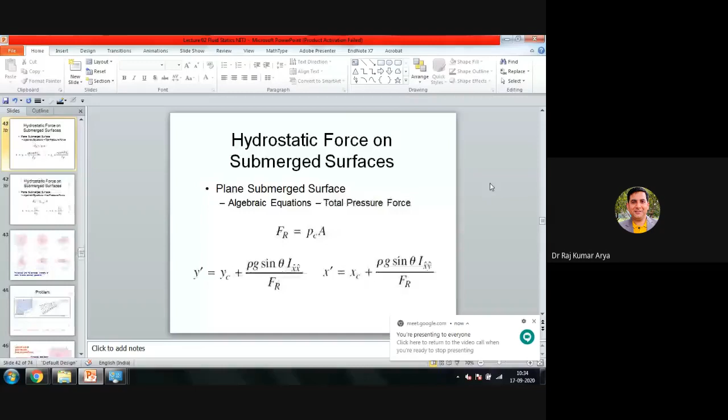In the previous class we were here, right? Yes, sir. So in this particular problem, what we were solving, first we calculated the force, and for force you have just calculated the pressure and then multiplied by area. So at this particular point, you calculated the pressure at a particular point y, multiplied by this dA. So you got your differential force, right? Respond along the way too, right? Yes, right, sir.

In the last class we were here actually, and then we were calculating. Can you see the slide or not? Yes, sir, we can see. Visible, sir. So why are people not responding anything, just like 100% silence? If I say something, at least somebody should respond. Sir, your voice is actually quite low. It's getting difficult to hear it. So you are not able to get the voice also. Actually, I was trying to do something.

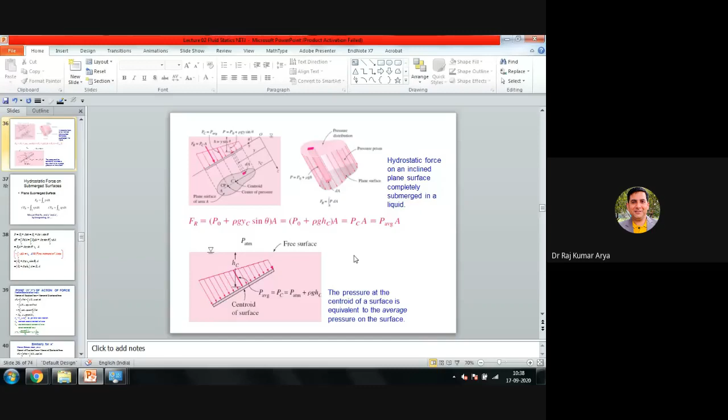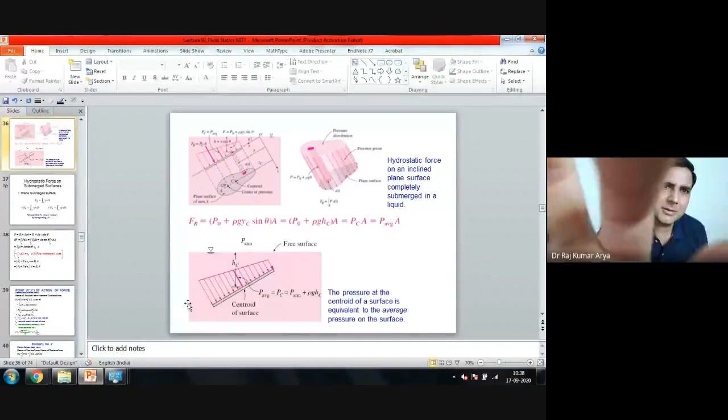Hello, sir. Now, can you hear properly? Because I was trying to fix something on the board actually. Yes, sir. You were not getting voice because I ordered the headphone and it has not yet come actually, so I can't help it. Anyway, we were somewhere here, so we were solving here. Can you hear properly now?

Yes, sir. Okay, fine. So in the previous class, we were somewhere here, and there we were calculating some pressure here, something here actually. So we were somewhere here, right? So in this particular case, because I am not used to this marker thing, it still takes time.

Everything is tedious actually. All electronic items just need a lot of training.

So what we have, we were previously here. So in that particular case, you were finding where this force will act. So you have taken a distance y from here, and from here you have calculated the corresponding pressure at this particular point, and then you have calculated pressure multiplied by differential area. So the differential area, this is your dA here. And which is how much? That was your dx into your dy, right?

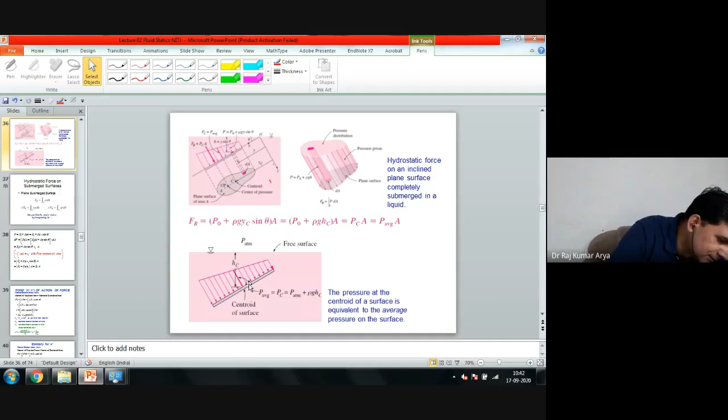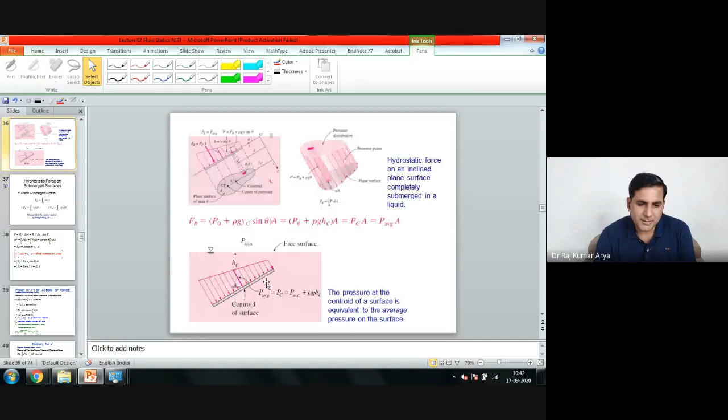We were finding the net force to act there, and so for that purpose we were finding the moment here. Under the balance condition at this particular point, let's say you want to apply a force on this side, and let me change this shape because this will work for us. So let's say you want to support this particular thing, so you want to apply a force which is equal to the net force provided by this, and this force was nothing but the pressure corresponding to area. So you have some pressure here, some area, pressure multiplied by area. So you have calculated it by integrating the entire pressure into area. Fine. So therefore you got this particular expression.

Now we want to calculate where the net force from the other side would act, meaning the net force from the fluid side. This is the force from the fluid side, provided by the fluid pressure. This is the force which you are providing from outside just to support it. Fine. So in that case, you want to know how much distance away from here it will act. So these are two forces. So you are calculating the moment of the resultant force about this point, or any point on the surface. Choice is completely yours. So about this point, and the moment of all individual pressure forces. So what are the individual pressure forces?

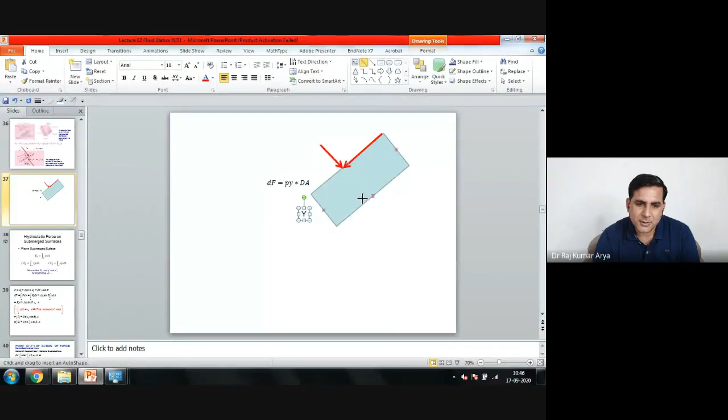This is y. So you are calculating pressure at point y multiplied by dA. So how much would dA be corresponding to this? If you want to calculate just dA, just draw the two lines here. If you want to find dA, dA corresponding to this would be only this much area, where you have just changed a differential y here. So this is your dy practically, and dy multiplied by width.

How much is the width? This entire gate, this much is the width of the entire plane. So this is your w actually, or you can say this is your x coordinate, this is your y coordinate. So your dA would be this differential change in y, dy, multiplied by this entire thing, dx, which is the width of the gate. That is your dA. Fine.

So you can rewrite this particular equation again. So what would you rewrite here? What would be py? So this is your y. So what would be the vertical height here? How much would the vertical height be? This much only, right?

Hello? Yes, yes, sir.

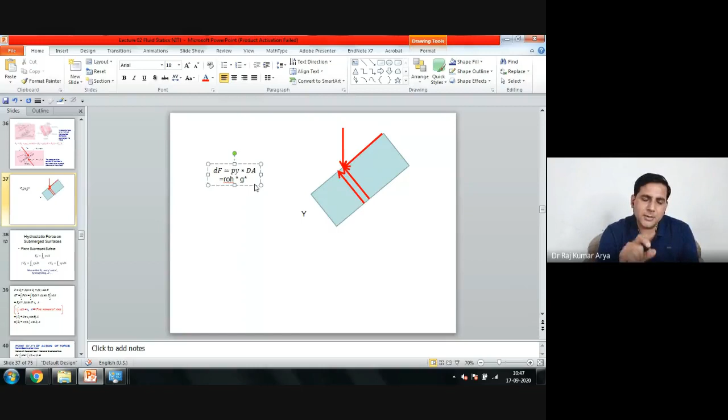So this much is the vertical height. This one is your y. You know this angle from here to here, the theta. So this would be your y sine theta, right? So you can write the py formula now. P would be your density, that is rho, multiplied by g, multiplied by y. Now this py is the pressure corresponding to this y. This would be this much height only, so that is your y sine theta actually.

I'm just writing theta as capital T so that I don't have to write theta, right? This is your pressure at this particular point y, and you are multiplying by area. Why are we considering dy here? We are considering that if you change y slightly, the pressure intensity will not change much. So pressure would be uniform over this differential y, so that you can calculate the force as pressure into area.

So this dA would be dy into dx. This much is dy, and this one is your dx. So dx is the width of the plate, and dy is the length which you have changed. So this is the differential force. Now for this case, the width is the same everywhere, so you can replace dx in the next line by the width of the gate, that is w. The rest of the things are the same. So you have integrated it there.

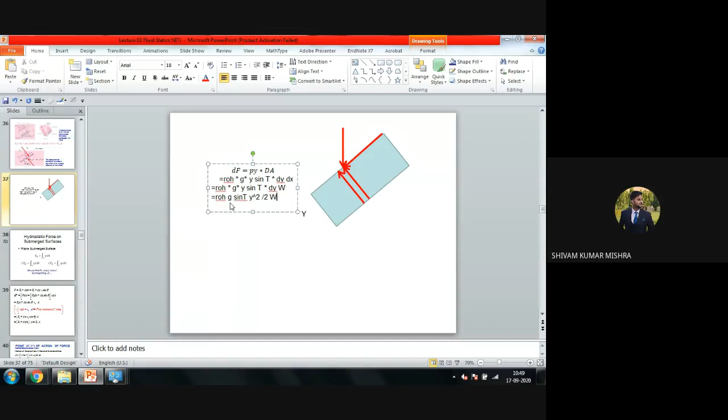So in the last class, what expression did you get? You got rho g, then sine T, then y square by 2, multiplied by w, right? Yes or no? Yes, sir. This is your entire force for the entire y. Now you have integrated over this entire length. This entire length from here to here is L. So based on that you will get the force.

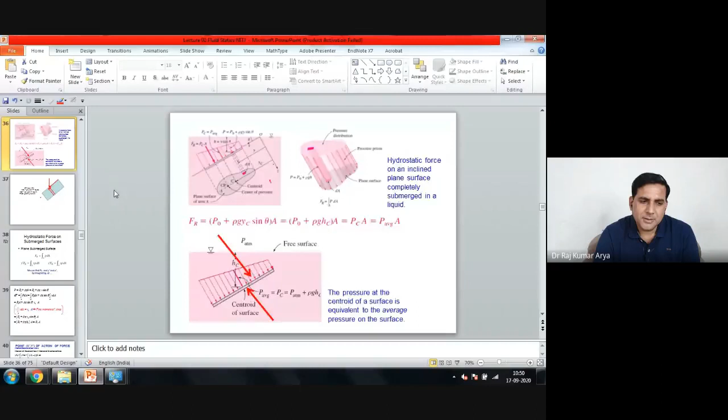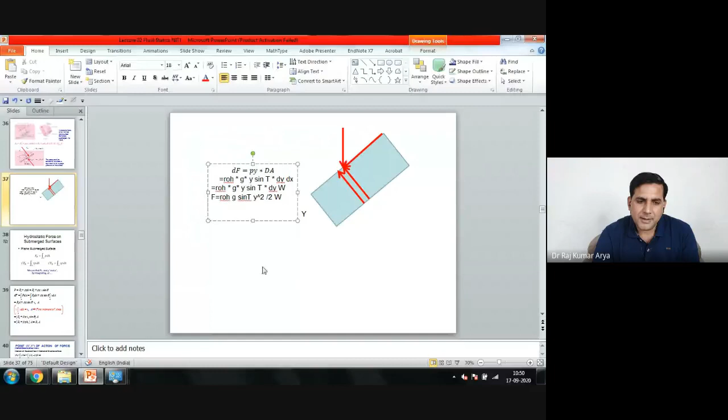So the force expression comes from the pressure only. You have rho g. You can rewrite it in this particular format. In equation format, F would be equal to rho multiplied by g multiplied by y sine T divided by 2, and one more term, y into w, right? Correct? And half of this is called the centroid, because the total is y.

If you know the total length is L, you can write this in terms of L by substituting the limits. So L is now the entire length of the plate, and you are calculating L by 2. L by 2 means you are at the center. So that is called the centroid y coordinate from this point. And then you multiply by sine T, so that is the vertical distance of the centroid from the free surface.

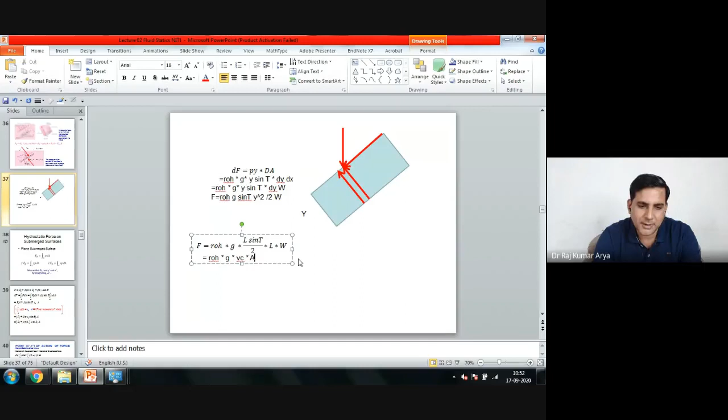This is called the coordinate of YC, the centroid coordinate from the free surface. You can rewrite this into rho into G into that. This becomes YC multiplied by L into W, which is the area of this entire thing, where L is the length and W is the width, so this becomes the entire area of the plate.

Now what has come from here? This has come as rho G YC, where YC means the distance of the centroid from the free surface. In this particular case that was L by 2 sine theta. Now this particular term is just your rho GH type of thing.

So you can rewrite this into another format: rho, pressure at the centroid into area. This is the coordinate of the centroid, the vertical height, multiplied by rho G, which is the pressure at the centroid. So pressure at the centroid multiplied by area will give the force on this particular plate. Is that clear?

Now we want to find the direction, the position where the net force would act. So far you have just calculated the force, now you want to find the direction. Let's say this force, we call the net force, or in the book they have given the name FR, the suffix meaning the net, the resultant force.

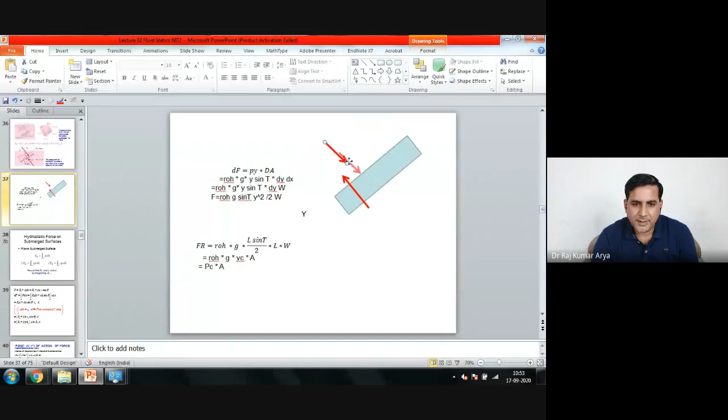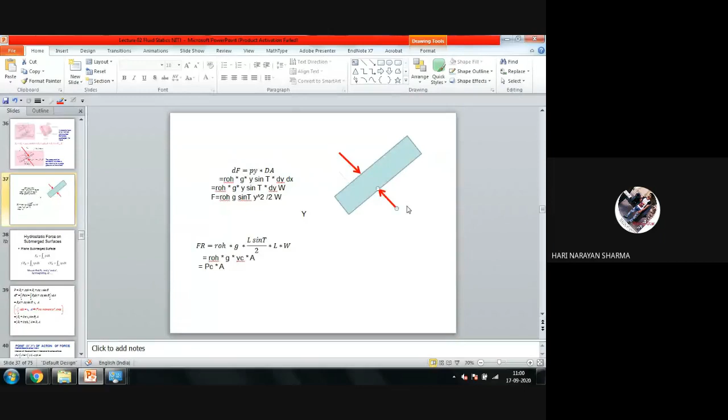Sorry, actually I have to give the question papers to kids. Hello? Yes, sir.

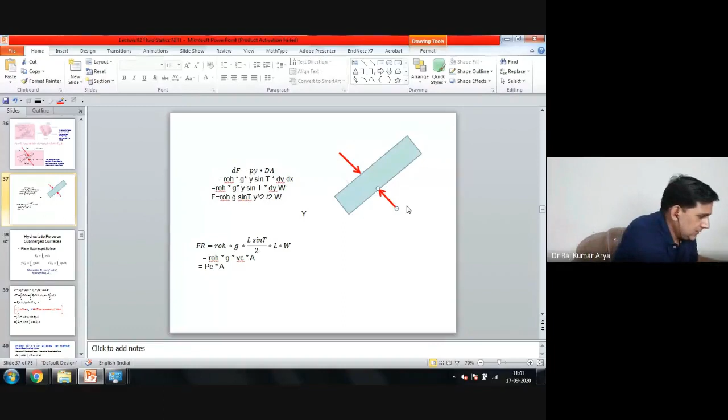So in that case, this is how we calculated force here. You have this YC which is the distance, and then you want to find where this net force would act. So what you are calculating here is an individual force. This is the differential force, Py into dA.

If you are calculating at this particular point, let's say you are calculating force at this point here, this is the differential force dF, because that is due to this much fluid only. This is the formula of that particular force.

Now you want to calculate the moment of this force about this point. So this is, let's say, y distance away. So you are just multiplying here by y. That will become the moment about this particular point.

Any response? Yes sir, hello, just say something at least. So you have this force here, you want to calculate the moment of this force about this particular point, so you multiply by this particular distance y. That is called the moment, so the same thing should be here.

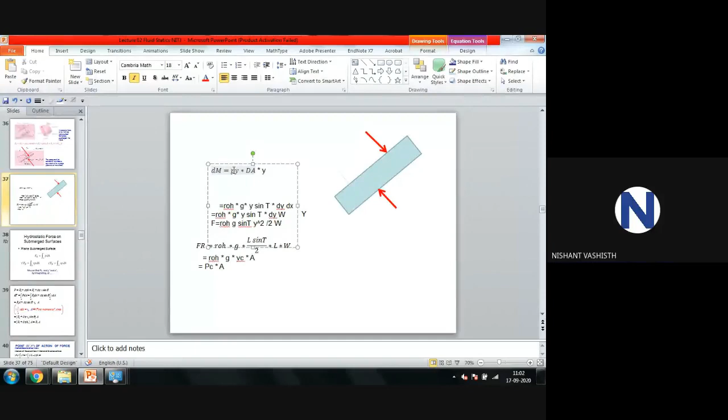So now you are calculating the moment here, the differential moment caused by this particular small force. Now suppose you want to calculate this moment for the entire plate, then what will you do? You will integrate this, yes or no? Yes sir, right, you would integrate it.

So what you would do here, because this Py formula is the same, in place of Py this is what is coming. This is your dA, no change in dA. You have just introduced one more term here, y. So you can introduce that term here, and now this is your differential moment, which you can integrate again.

So what are the variables here? At this particular place you are multiplying by y, so till here no change, only thing you are multiplying by y just to calculate the moment. Now you can calculate the total moment, if you want to calculate it, you have to again integrate it.

Again, no response. Should I wait for your response, or should I keep on talking? At least somebody should say yes.

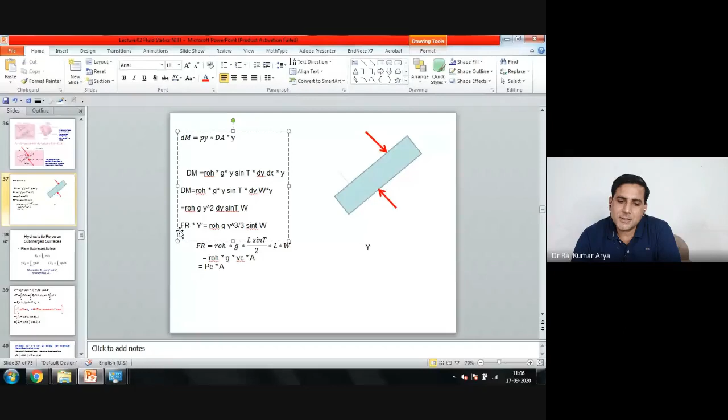Practically this is your FR into y dash. This means the net moment of all these pressure forces, and this must be balanced by the particular force which you are applying at a distance y dash away from point O. So you already know the FR formula, or not?

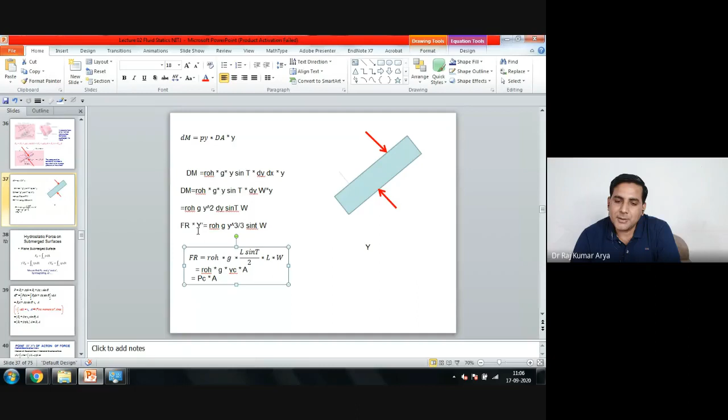FR was this only, right? This was your FR only. Yes or no? So you can substitute the FR from here to here. You will calculate your y dash. Yes or no? Y dash will come. So what would be the expression of y dash?

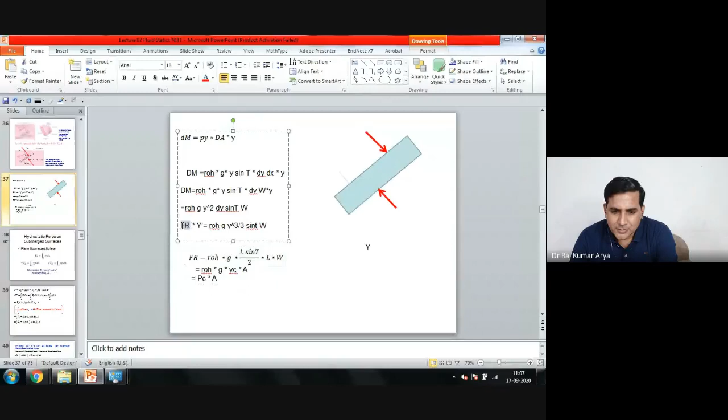If you substitute this equation from here - this was your FR - so if you substitute this FR here, this is your expression. At this place, you have substituted the FR expression from the previous derivation. Y dash you have from here - this was FR into y dash - and this one you got recently. So in place of y, you can substitute L,

because you are calculating for the entire plate. Yes or no? So from here you will get your expression of y dash. How much will y dash come to? Can you help me? Your rho g and the rho g will get cancelled, one L will get cancelled - there's L cube here - sine theta will get cancelled, W will get cancelled. So what would come here?

L square by 3, maybe sir. So this will come, I think, 2 by 3 L square. Correct? 2 by 3 L will come, sir. 2 by 3 L. Okay, 2 by 3 L. So this is the point of action of the net resultant force.

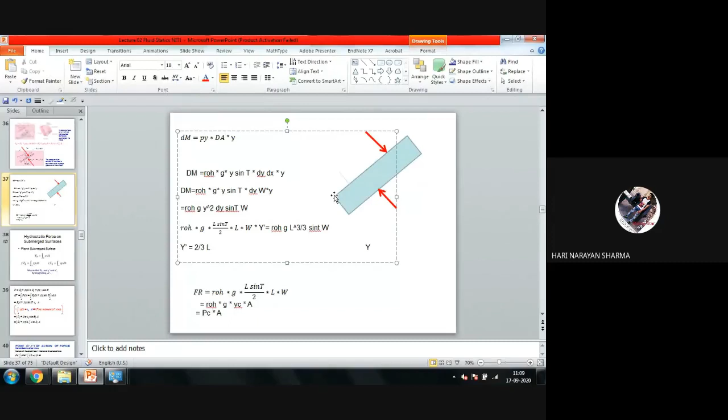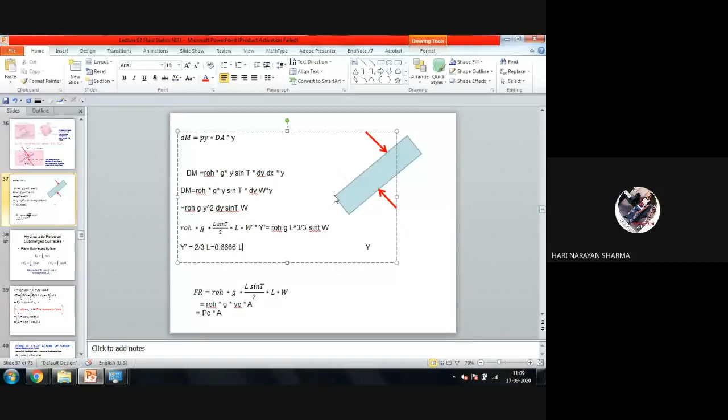It is where? How much will this come to? This is 2 by 3 L. If we solve this further, it will become something like 0.66 L, right? Yes sir. So this acts slightly more towards the lower side than half. This means the net force acts not at the centroid point, but slightly lower than the centroid.

So this is just to have a check when you are solving a particular problem and calculating the point of action of the force. In most cases, the point of action of the force would be always lower than or just equal to the centroid. Equal would occur only in rare cases. In case of fluid pressures, it will always be lower than that.

Yes, sir. Correct? So you got point of the action also, you got the force also. Your work is done.

Because once you know that this net force would act at this particular point, I will put an equal force in front of this point, then this entire body would be in equilibrium now. Yes or no? Yes, sir. Right, sir.

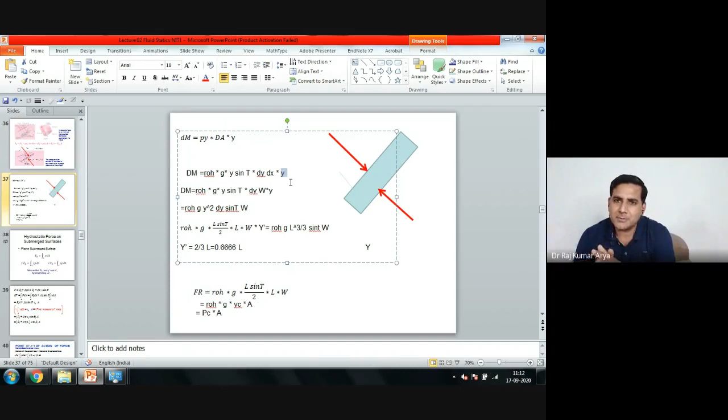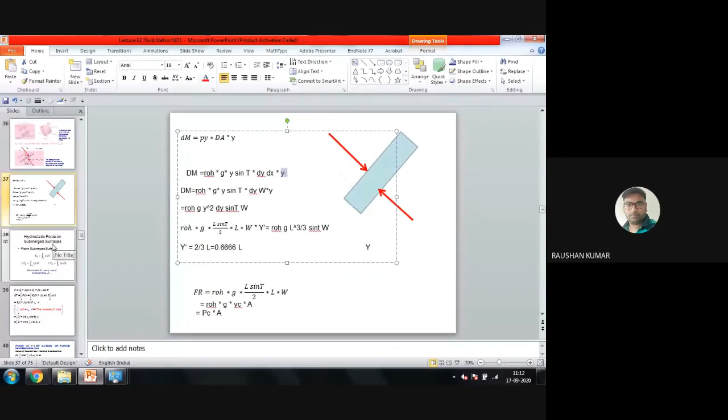And that way, you have to correlate your x and y. So what is the correlation between x and y, and you will get the expression in the solution for that. Is that fine? Yes, sir. Now let's come to the slide part here, so now we can have it maybe in full screen mode.

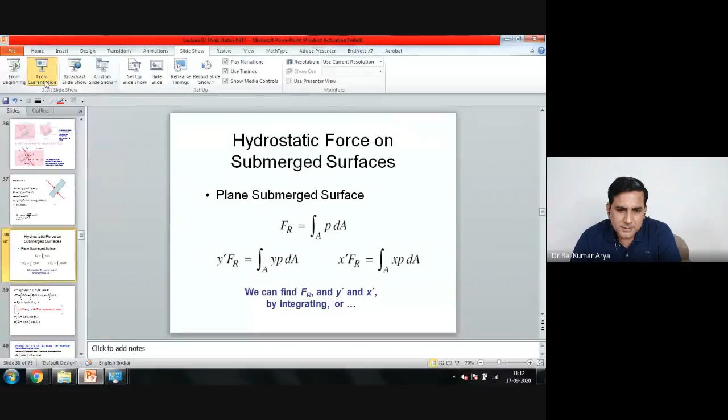So what you have here, this is what we did: net force would be pressure into the area dA, and then you are finding the point of action of the force, and this is the net force which you will calculate. This will act, let's say, at y-bar distance far away from the plane surface. Calculate the moment, balance the two, you will get the y-bar. That's what we did in the previous derivation.

Same way you can calculate the x coordinate also. So this is the xp, which is practically the x coordinate of the centroid, and the pressure at that particular point multiplied by A again. Fine.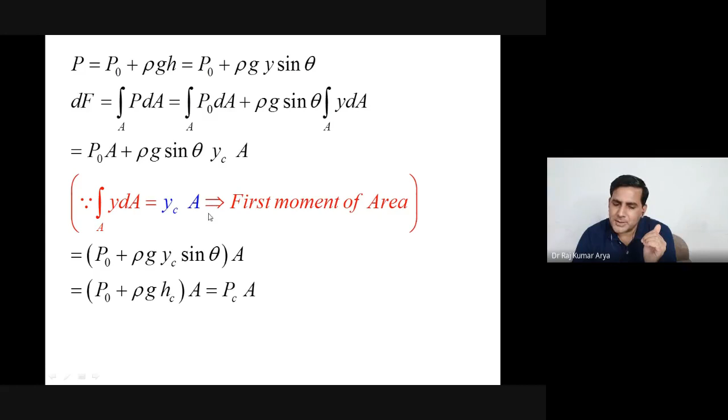So you will get, we got till here PC into A finally. And y into dA is called the first moment of the area. If you already know this value from somewhere, you can also calculate it. So you have another derivation here just to calculate the point of action of the force. This is what we did just now: sin theta, y square dA, and all this.

And this y square dA is called the second moment of the area, which we calculate from the x-axis. So if you know these values, substitute here and calculate it if you are comfortable with these. From here to here, till this particular point, you need not worry about anything, you are just doing purely mathematics. So till here is fine. You need not use this one if you are not comfortable with it. Choice is completely yours.

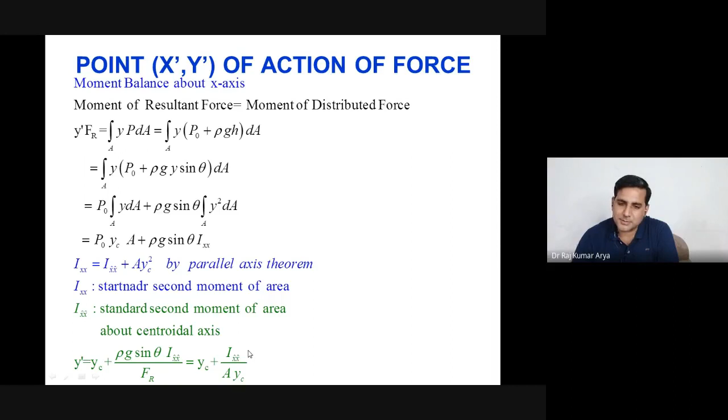So you can calculate this y-prime in this way if you know this one, and these are another expression just to calculate the center of action of the pressure force. Same thing you can calculate for the x coordinate of the force. So that's where you are calculating the moment about the y-axis in case of the x coordinate, while in case of the y coordinate, you are calculating moment about the x-axis.

So you just multiply here, you have pressure, and you are just putting here one term X, and dA was same. Just P into dA was the pressure force, you are just multiplying by X only, correct?

Right? Yes, sir. So this is again you got here xy into dA. This is also again called the second moment of the area only. So if you know this value, put it here, get it here. If you don't know, just do the calculation from this line. Only you know the x, you know the dA, substitute there, integrate them. Fine.

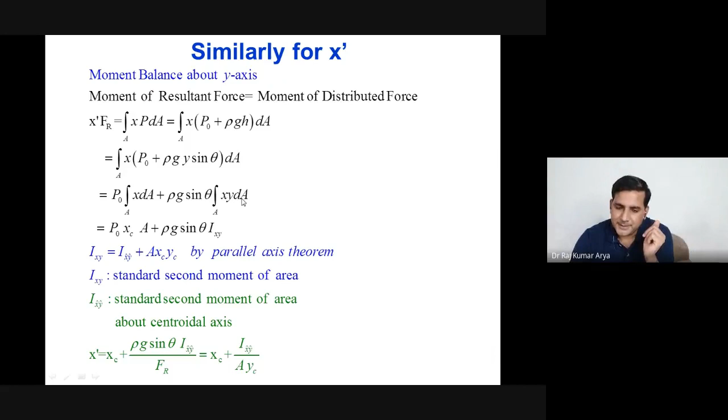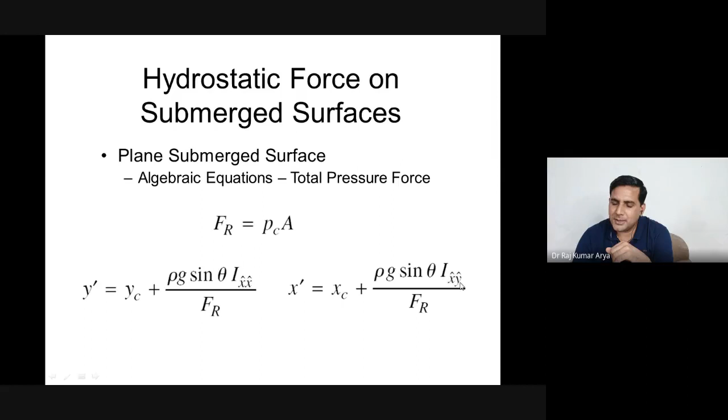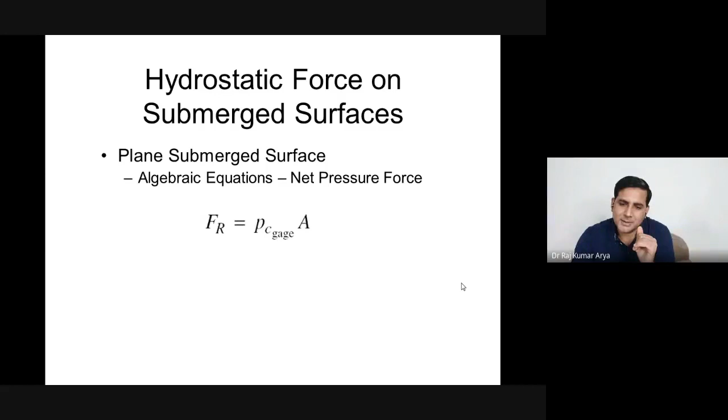Now, this is what we did. In short, we got these particular formulations. One is this formula, next is this one. So you can remember them. Now, if you know this Ixx value or Ixy value, you can substitute there, you will get the answer. So these are known for many geometries actually. So if you see some of these figures here, this one here.

So let's say you have the rectangle here. So the rectangle case, if the orientation is like that, if this is your y coordinate, this one is the x coordinate. So area would be A into B, the full A or full B only, that is the area. Now Ixx for this case, the moment of the area about the x coordinate here, this would be AB cubed by 12. This is Ixx about the centroid C. Fine.

Circle case, you have this pi r^4 by 4. In case of the ellipse, you have this one. So you have this triangle here, you have AB cubed by 36. Half circle, you have this one only. So you see, some of them you may not be comfortable to remember, except maybe a rectangle or maybe this circle, because these look comfortable to you, right? Except these look further complicated. You see the value here. Correct or not? So unless you are very confident with them, you are not advised to use Ix formulations.

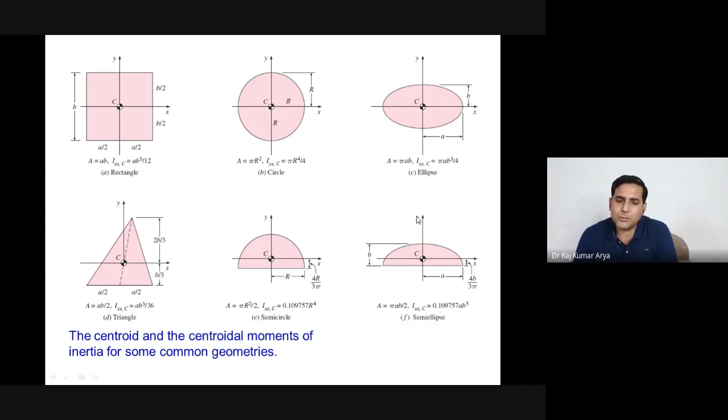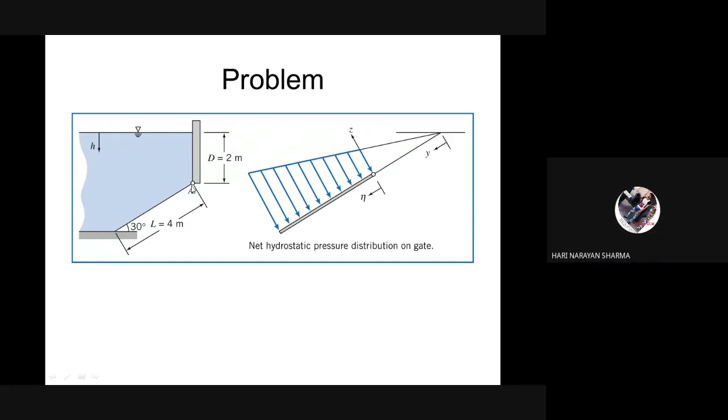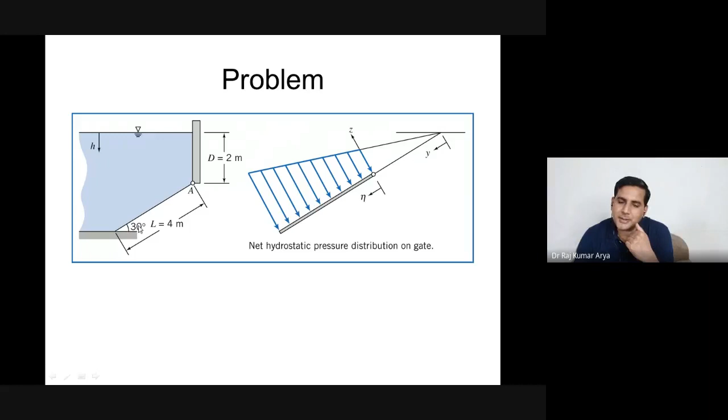Have you heard the term hinge so far? Yes, sir. Hinge is just a support where your door turns. Door जो आपके frame में fit हो जाए, those are called the hinge only. So this gate is such that whenever this pressure is high, it will close the gate. Or by chance, let's say पानी भर रहा है. Now you want to take out some amount of water from here. What will you do? You will apply some force at this particular point here. Let's say I can use the directions here.

This view also looks fine, or is this not visible properly? Fine, sir. It's fine. Not interested. बहुत हो गया है.

So ये आपको खोलना है. If you want to open it, so यहाँ आपको force लगाएंगे at this particular point, and slightly you will move the surface up, and then water will come out. Yes or no? Yes, sir. That is the different part, how much we want to apply.

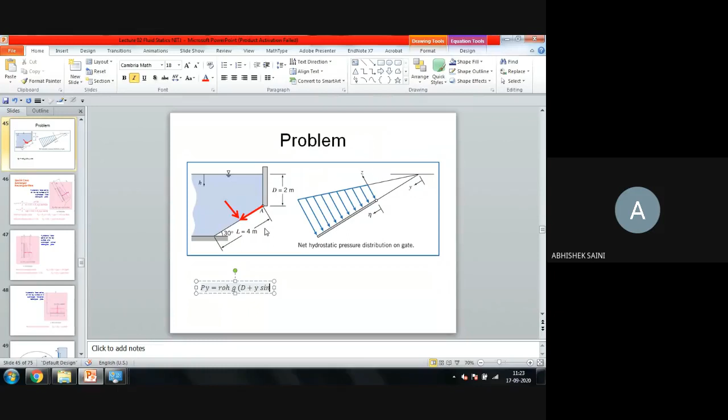Can you help me? Rho g d plus y. Yeah. So rho into g into d plus y sin theta. L sin theta? L is the whole length. This much y is just y sin theta. Okay? So you have this y sin theta. Correct? Yes, sir. This is your pressure at point y. Can we calculate the pressure force?

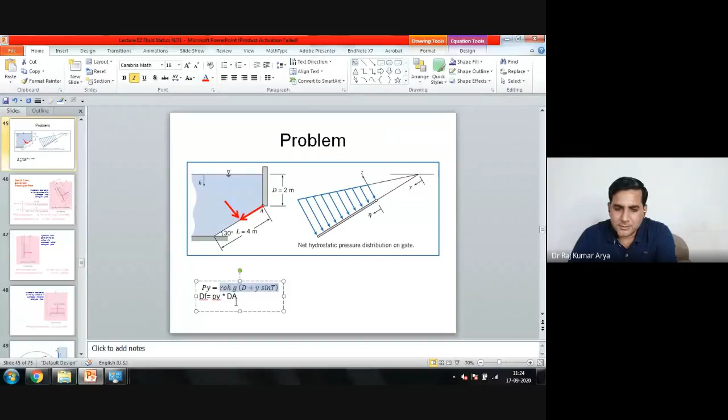Yes, sir. So if you write the differential pressure force here, what do you need for the differential pressure force? You just need Py and multiply by dA. That much is fine, right? Yes, sir. You have the previous expression only, same thing, so you can write this here. And now what is your dA, differential area? This is the gate, y here and this much width of the gate. What should I write for the differential area? Width into dy.

So dy into the width, let's say width is w. Yes or no? Yes, sir. Now this can be integrated for the entire L as we did in the previous one. Only thing, you got one more term here, d, right? So you can calculate the net force, and you should also calculate y dash. Those two calculations you do for the next class. You have to tell the expression of the net force and the expression of y dash.

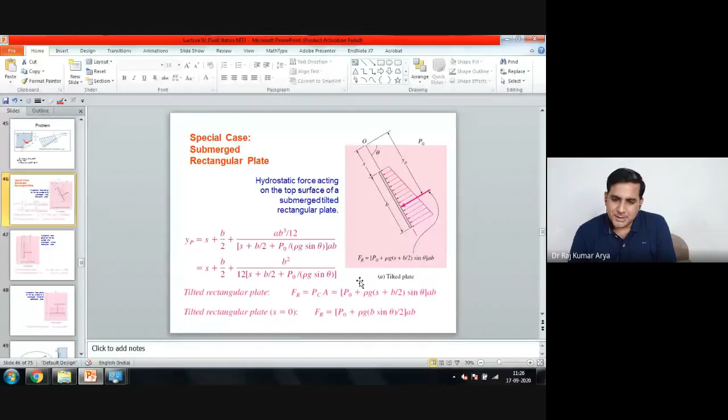So we will end at this particular place, and in tomorrow's class you should have these two, because only if you do this can you proceed further. There are shorter formulas for it, but I am not interested in the shorter formula. I always prefer the integration way, because for me that looks comfortable. So try to find it out, and if you have any doubt, you can ask. Otherwise, we will close today's meeting here.

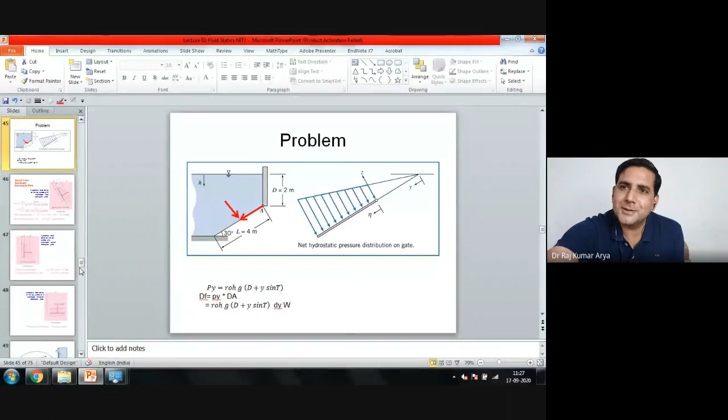Hello. Yes sir, there was a problem in a worksheet, but sir, it's already time for the next class. Yes, it is, and I can tell you in 1 minute if you give me some time. Okay, sir. I just manage this board and a lot of things. Just 1 minute, I can explain on the board.

Did you do the derivation? I can't hear you people. Hello? Sorry, sir, we can't hear you.

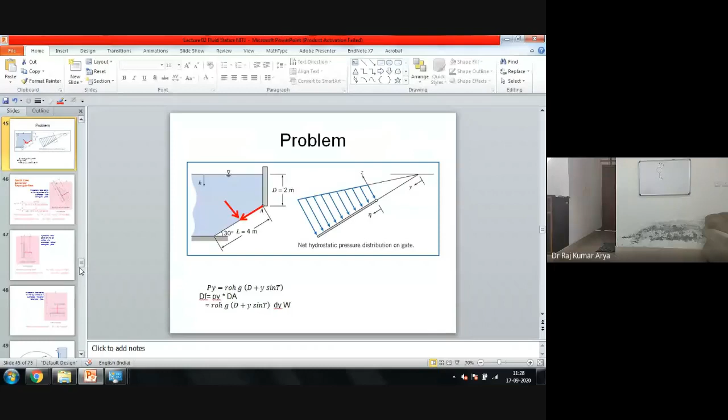Sir, your voice is very low. Sir, nothing is visible on the board. Really? It's visible very well for me. Yes sir, the board is visible now. The board is visible, right? Never mind, we'll do it next class. Okay, sir, no problem.